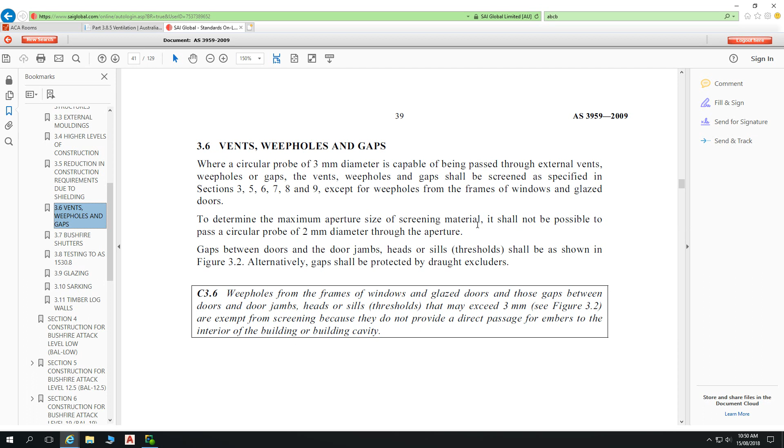To determine the maximum aperture size of screening material, it shall not be possible to pass a circular probe of 2 millimeter diameter through the aperture.

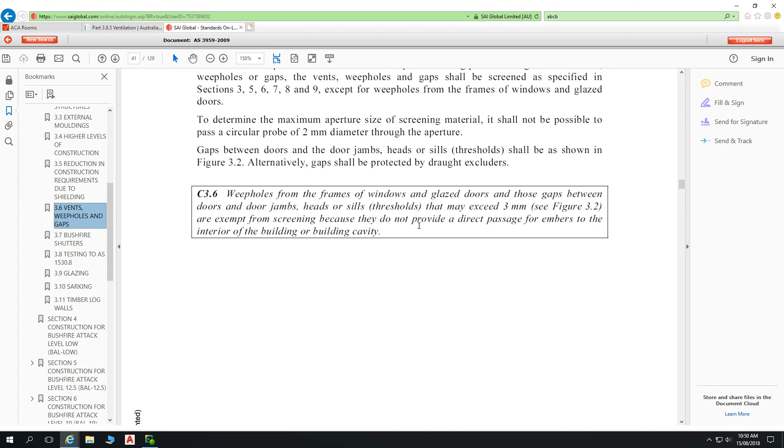So weep holes from the frames of windows and glazed doors, and those gaps between doors and door jambs, heads or sills that may exceed 3 millimeters, are exempt from screening because they do not provide a direct passage for embers to the interior of the building or building cavity. So those, from certificate for materials and methods, you may remember when we covered glazing, it had little weep holes in the base of our frames. They're exempted.

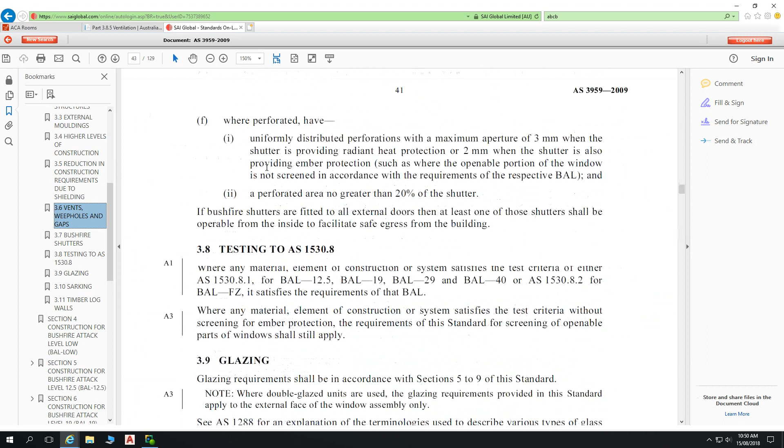And that's the bit I was talking about with bushfire shutters. If we were to just read that, we'd get the wrong idea.

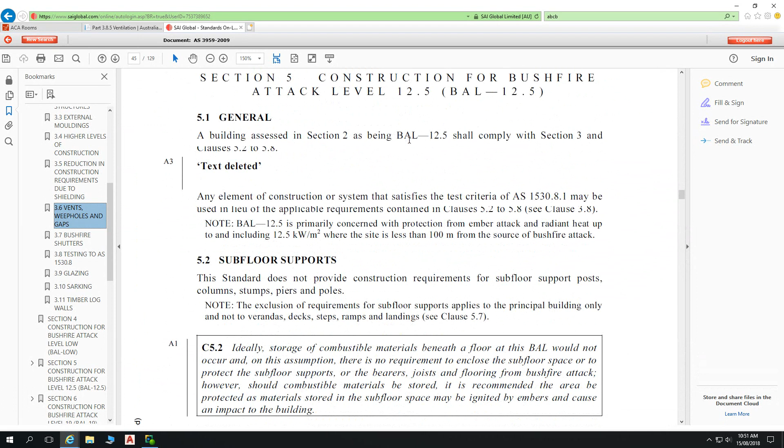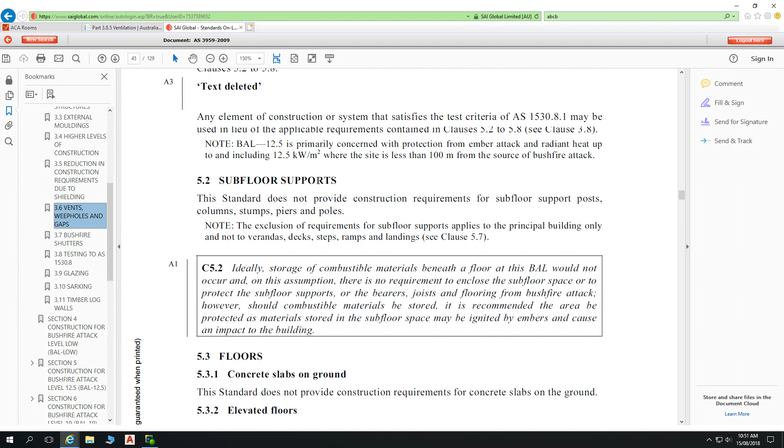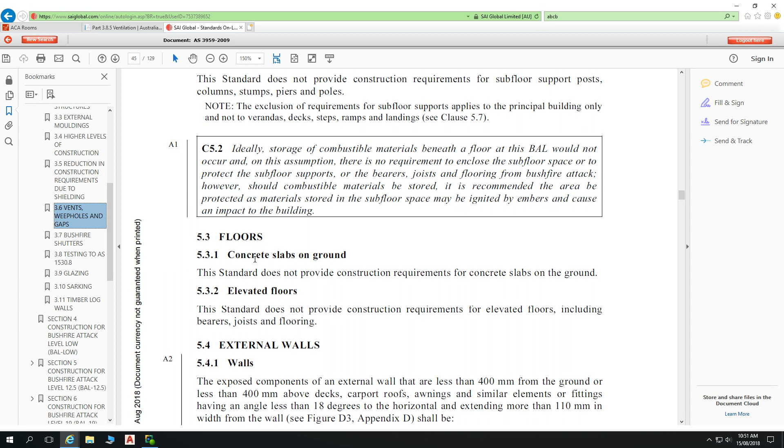So construction for bushfire attack level 12.5, we can quickly flick through that. Subfloor supports - this standard does not provide construction requirements for subfloor support posts, columns, stumps, piers or poles. So if we're in BAL 12.5, that's not a consideration for us. If it's a concrete slab on the ground, this standard does not provide construction requirements for concrete slabs on the ground. So until there is something in here that says you need to do something, basically you don't need to - there are no special requirements. So we keep looking through. Same with elevated floors - nothing for stumps and subfloors, and nothing for our elevated floors.

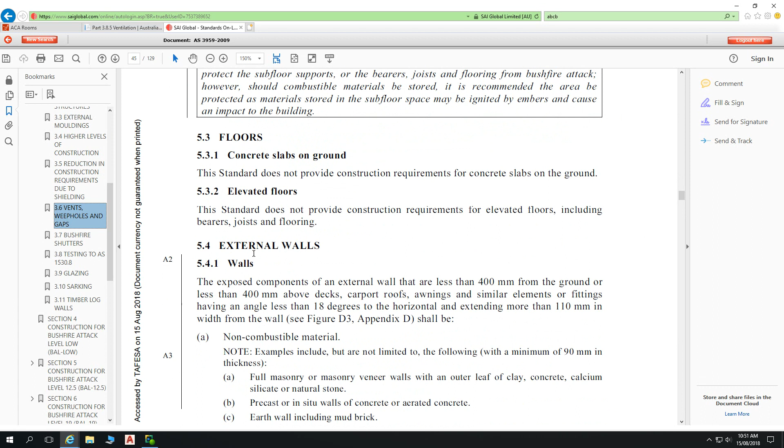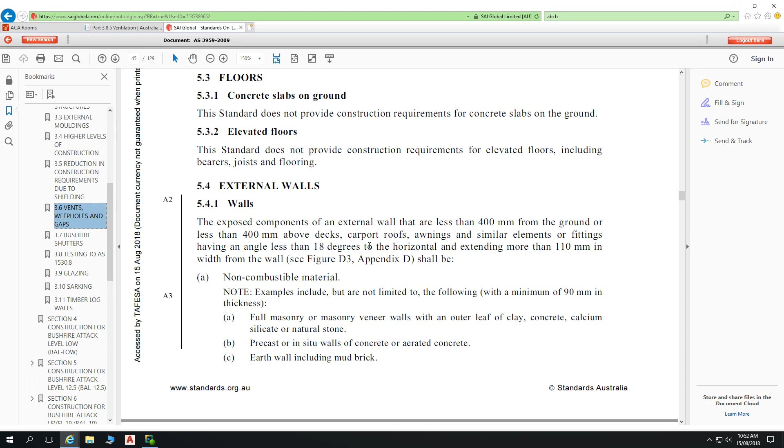Walls - the exposed components of an external wall that are less than 400 millimeters from the ground, or less than 400 millimeters above decks, carport roofs, awnings and similar elements, or fittings having an angle of less than 18 degrees to the horizontal and extending more than 110 millimeters in width from the wall, shall be non-combustible material. So with any of our walls down low, they have to be non-combustible material.

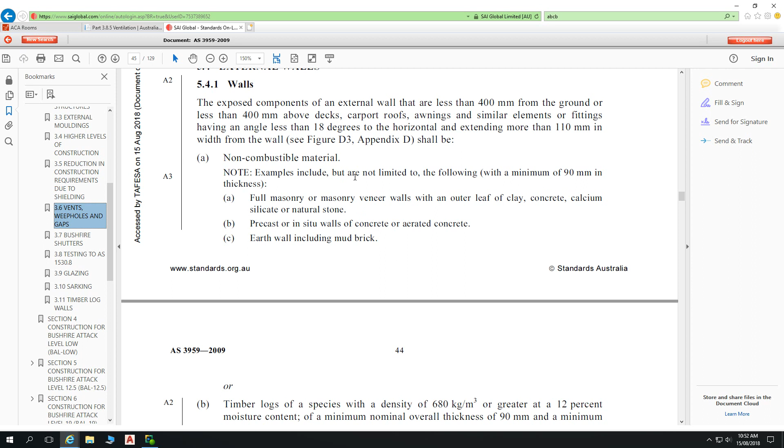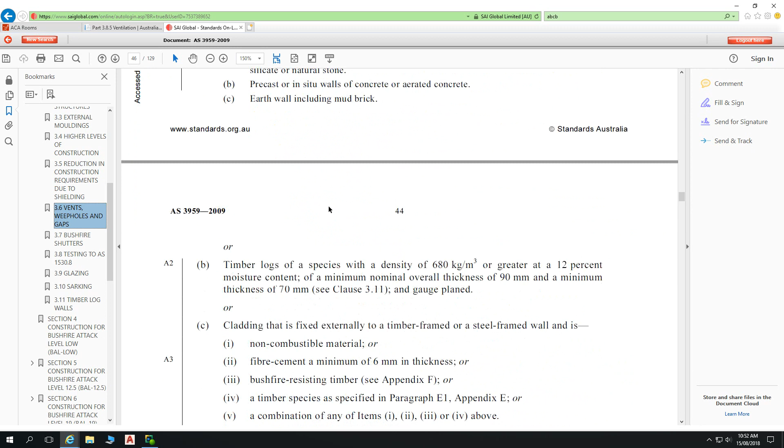So that's in bushfire attack level low, the lowest standard. And then it sets out what that can be: full masonry or masonry veneer walls, precast or in situ, earth wall, or timber logs of a species with a density of 680 kilograms per cubic meter.

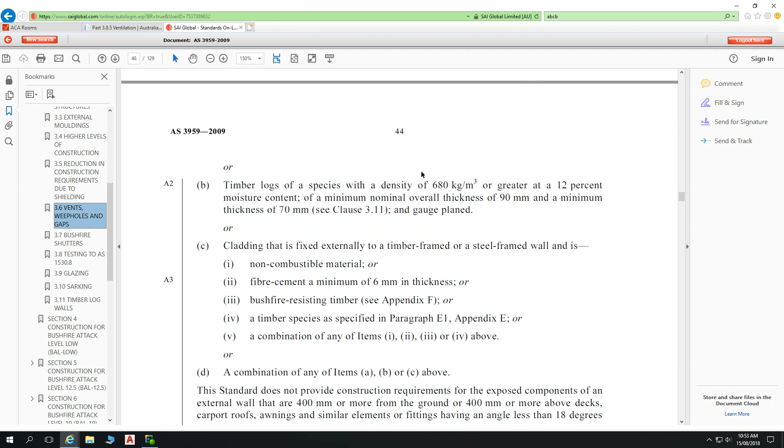And then we think, how are we going to meet that, or what does that 680 kilograms per cubic meter represent? Or cladding that is fixed externally to a timber frame or steel frame wall and is non-combustible material - any of those things mentioned above. Fibre cement sheet, minimum 6 millimeter thickness. Bushfire resisting timber, or a timber species as specified in paragraph E1, Appendix E. Or it can be a combination of any of those items.

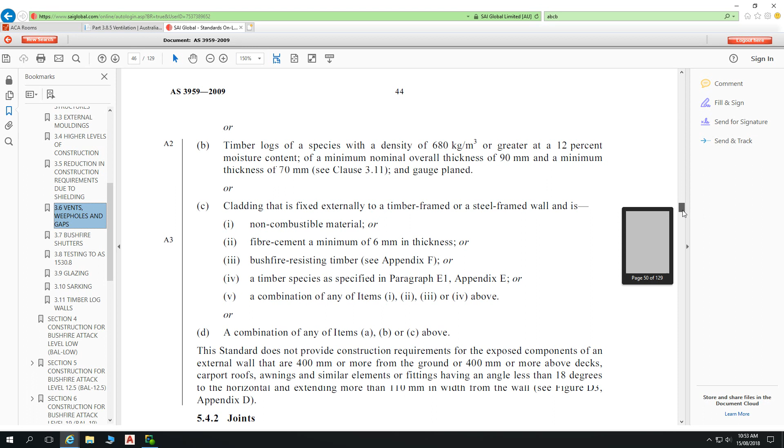So I'll just remember that, page 44. Let's quickly flick down to Appendix E. Let's go to watch, I'll go down here through Appendix E - is it going to open up? No. Oh, that's a pity, alright. So Appendix E hasn't - why would that be, that it's not opening up? I don't know, I think it's got something to do with trouble with them on my computer at home. Sometimes it's yeah, refresh and start again, sometimes it comes up, sometimes - have you tried Google searching just Appendix E? Yeah, sure, let's do that. Yep, yep.

AS3959. Look at images as well, see what there is, it's been put up there. Okay, no - Appendix E, here we go. Oh, there we go - type... oh, that's right, type Google, in not Bing. Appendix E. Yeah, yeah, yeah, yes, that's where I find most of my stuff.

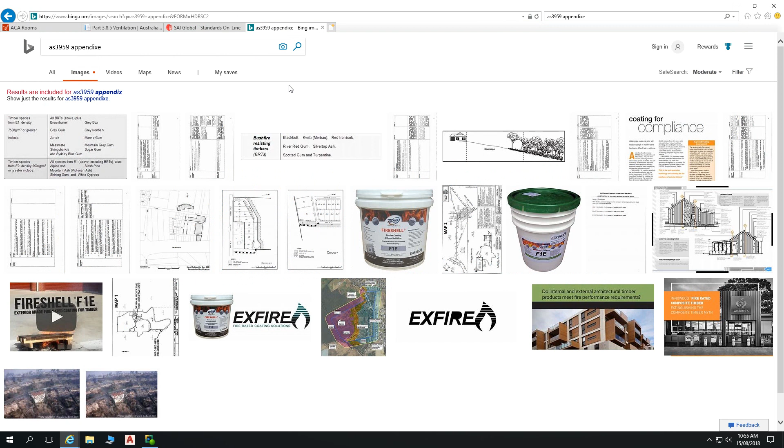No, Google's like that. Google, yeah, so it's actually a - thank you - PDF of timber species. Alright, so I'll get Google happening, and then get Appendix E happening. Okay. That up, I'll get Appendix E - that's a good way around it. Thanks, Mary.

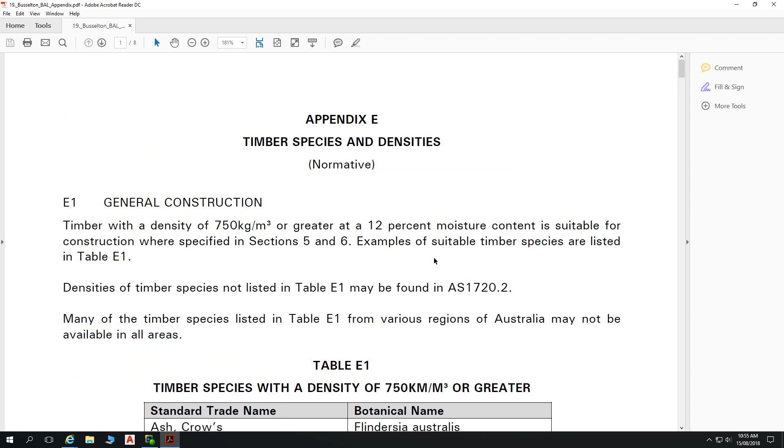So, yeah, timber species and densities. So, timber with a density of 750 kilograms per cubic meter or greater at 12% moisture content. So that previous one was saying you can use these timber logs, or you can use that timber cladding, if it's got a density of 680 kilograms per cubic meter or higher. If we go straight to Appendix E, all of these are 750 kilograms per cubic meter, their density.

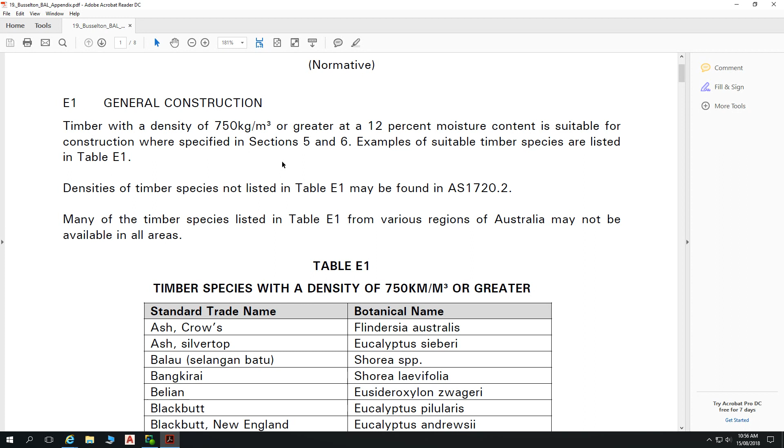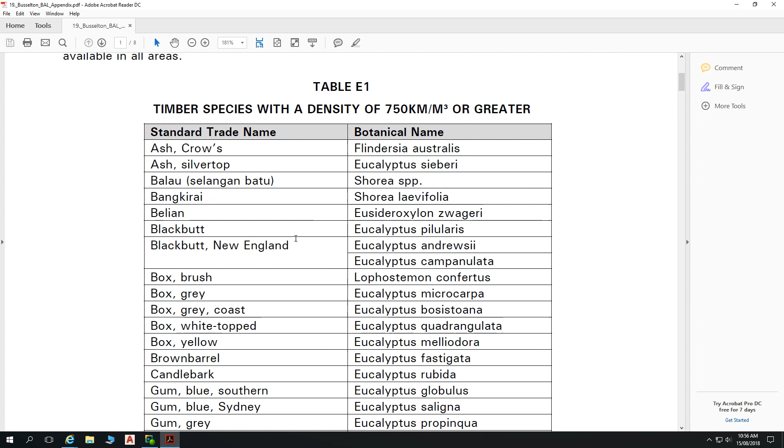So if it's in here, it certainly meets that requirement. But then there's direct reference also within the AS to Appendix E, and Appendix E gets referenced a lot, and that's why I'm showing it here. So there's a whole lot of Australian natives in this table - any of our eucalyptus there, so silvertop ash, blackbutt, and brush box, grey box, etc.

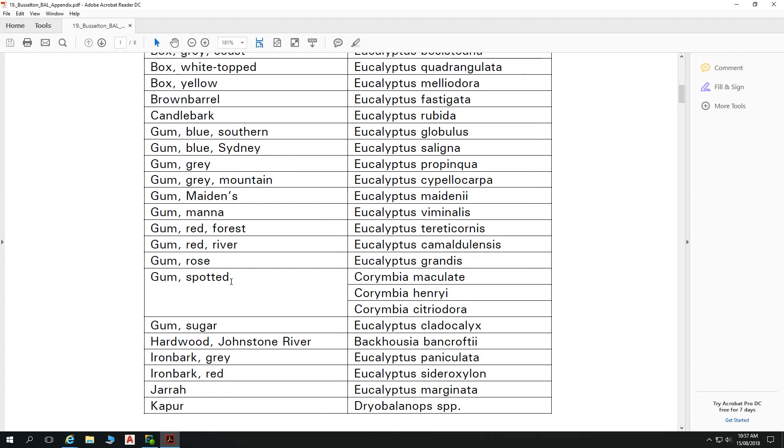Candlebark, another one. Common timbers you'll get from a timber supplier: ironbark, you can still buy jarrah as well, and certainly spotted gum is a very common one.

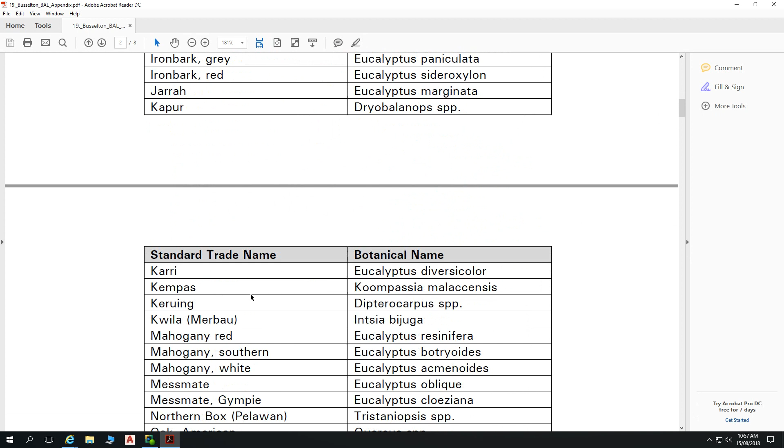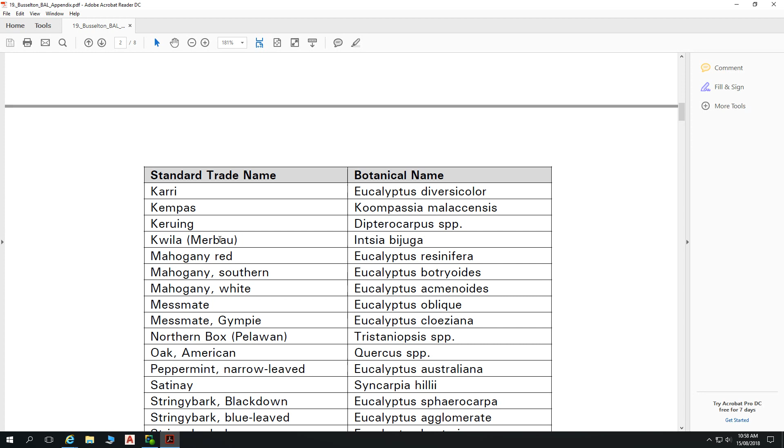It also includes decking materials like kapur, which are not Australian - I think that's Indonesian or Malaysian kapur. In a bushfire prone area you might not be able to go for the cheap option; you have to go with more expensive options like blackbutt decking or spotted gum. There's also merbau in here as well, which is a very durable timber, but once again a rainforest timber. So if the origin of the timber and the environmental impacts in terms of logging of old growth forest matter to you, that might not be the option.

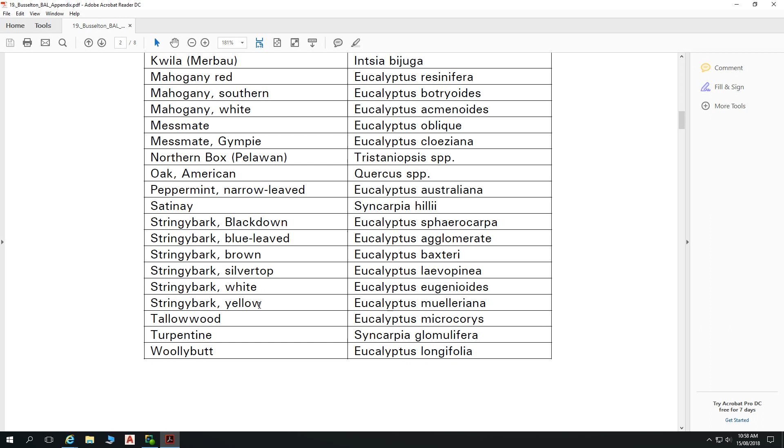But within Table E there are plenty of fairly available timbers and very good durable timbers that are good for using outside, for decks etc.

Suppose it doesn't have cypress. I would not imagine that cypress would have that sort of density - maybe it's fairly light on durability but not density. And same with Oregon as well - it's got American Oregon on there. American Oregon or American oak? Oak, sorry, American oak. Yeah, once again, something different.

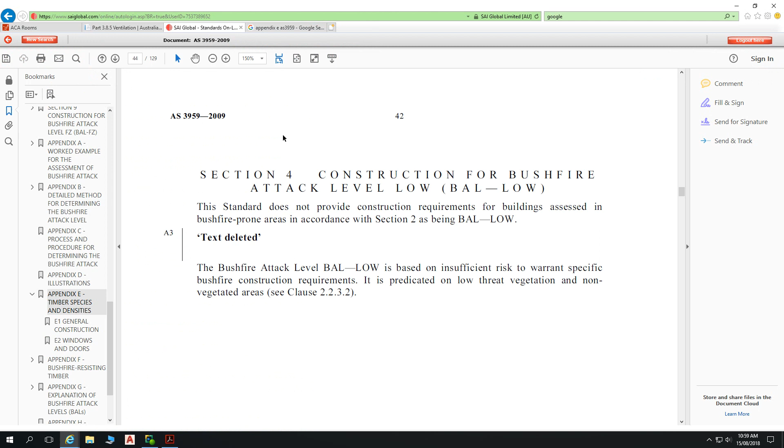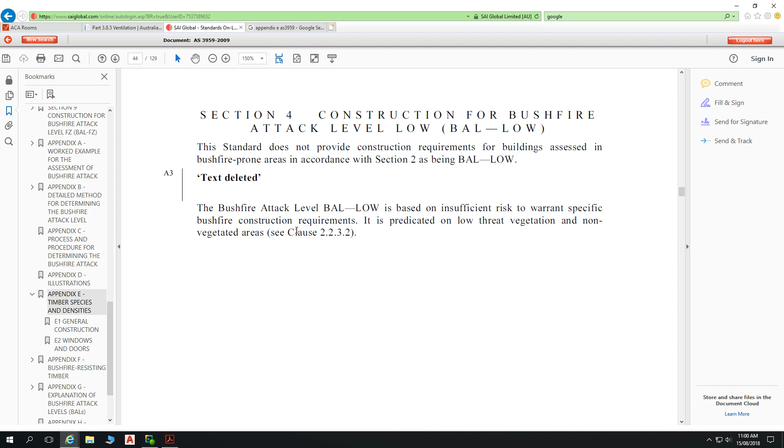Something I noticed when I saw that table had American oak in it - I haven't followed it up yet. But an idea I had a while back is that within the wine industry they use a whole lot of oak boards for oaking Chardonnay and whatnot. They get these oak boards and put them in the vats, and once a lot of the flavour and tannins come out, they get rid of them. There's a really good supply of very cheap timber via that, but what I'm not sure of yet is whether that's American oak, which is in this table. That might be a consideration at some point - so curious how you'd access that.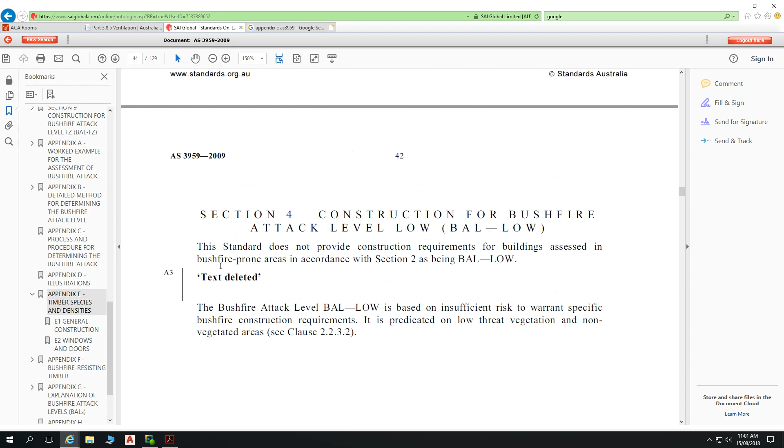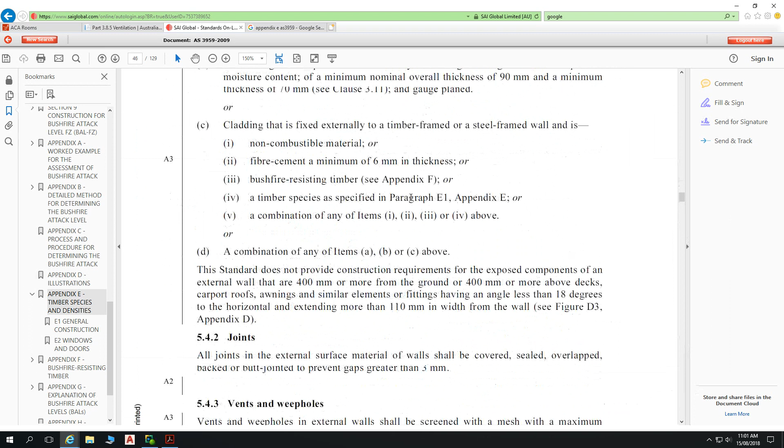So that's in our construction level. That relates to our cladding, but we'll also see throughout here mention once again of that Appendix E in relation to external glazed elements, doors, windows etc.

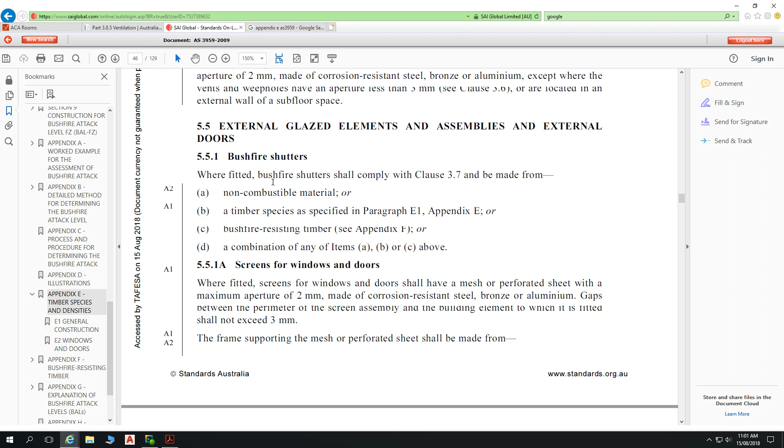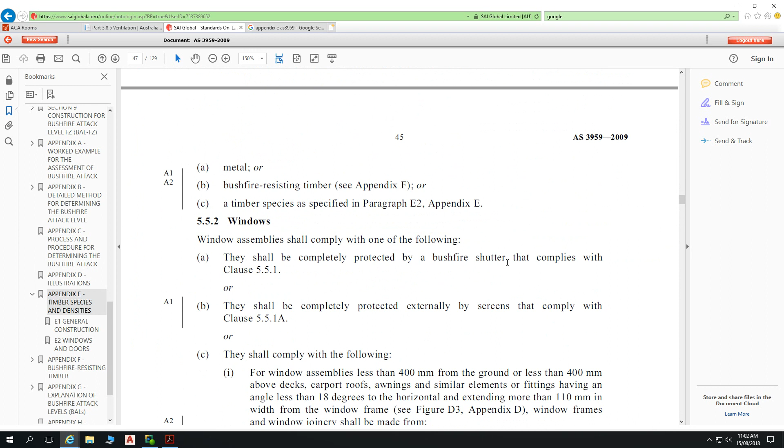Here's an example of what I spoke about before when it comes to bushfire shutters. Going down to windows - window assemblies shall comply with one of the following: they shall be completely protected by a bushfire shutter that complies with this clause here on how it should be installed, or completely protected externally by screens that comply with clause 5.5.1A. So you can have screens on the outside of windows, or comply with one of the following.

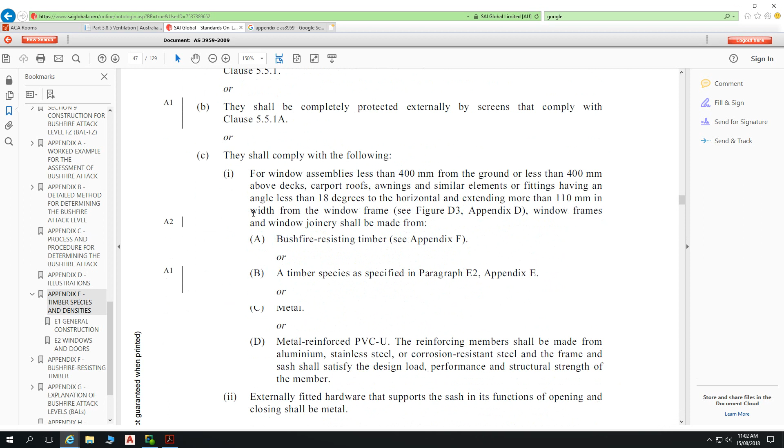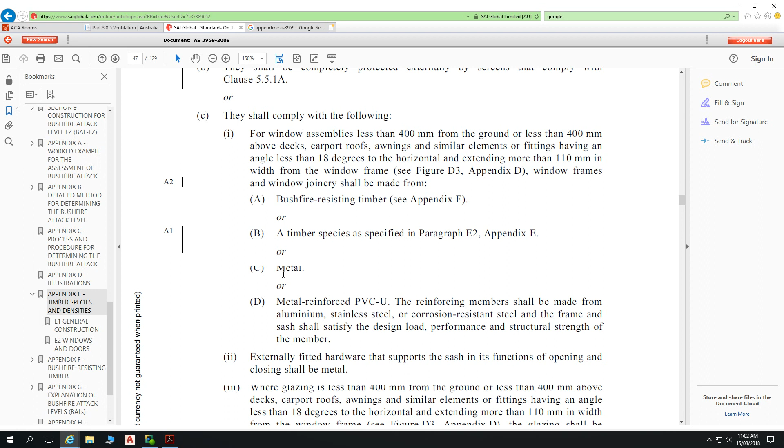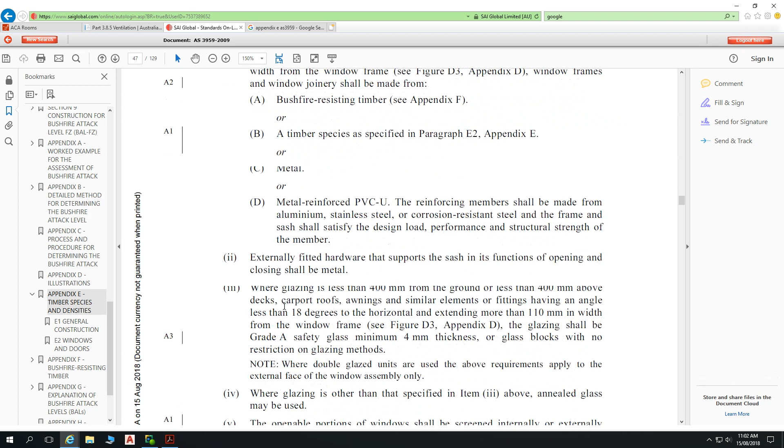And we've got bushfire resisting timber species in Appendix E, metal - so windows and doors can be metal frame, that's not too onerous - or metal reinforced PVC-U, where the reinforcing members shall be made from aluminium, stainless steel, or corrosion resistant steel. So plenty of fairly standard options within that.

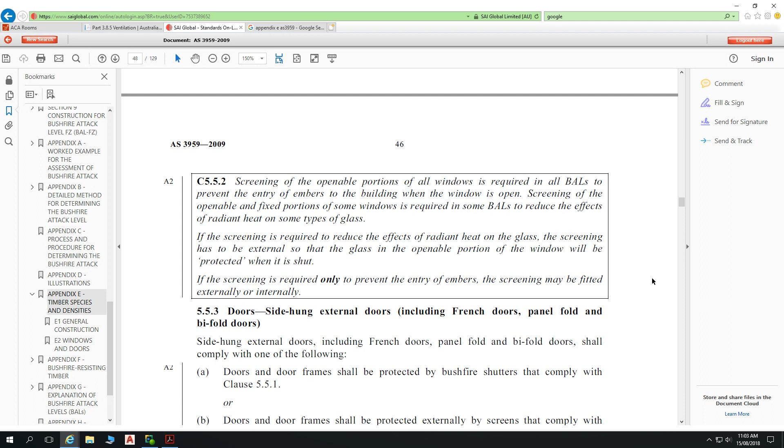So for putting together this report, the way I'd go about it is decide on what our bushfire attack level is. I think everybody's certainly past that point already. Go in there, take out the bits that apply to us - so we've got a deck, what is that deck doing? That deck means that this window or this door is within 400 millimeters of a fire source. Find those pertinent sections and pop them in, and that should be fairly simple.

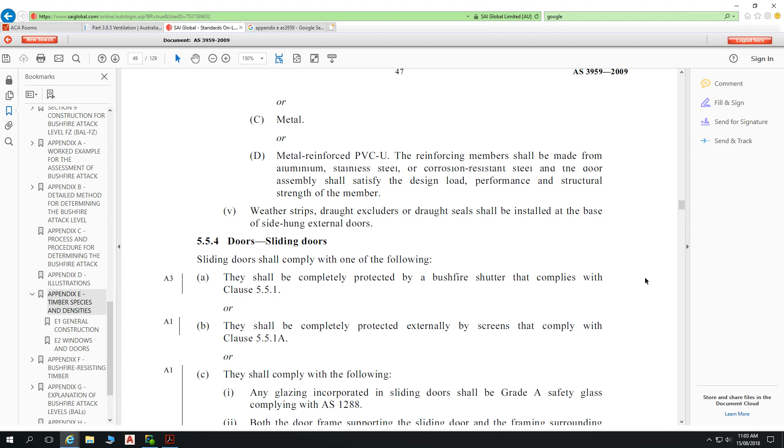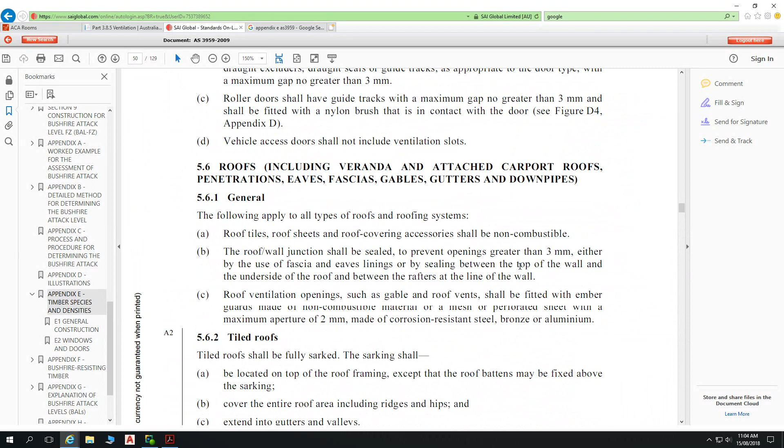I think we've gone through this enough and how it's laid out, and that makes sense to everybody - they're all laid out the same, they're all standards. So it's about going through it piece by piece, spending a little bit of time reading it, highlighting those sections that are important to you, or getting a document happening and cutting and pasting some bits if you feel confident doing that.

So that's the production of those two things - the light and ventilation, to ensure that's correct on your plans, and then our bushfire attack - our compliance with AS3959 and the production of the report.